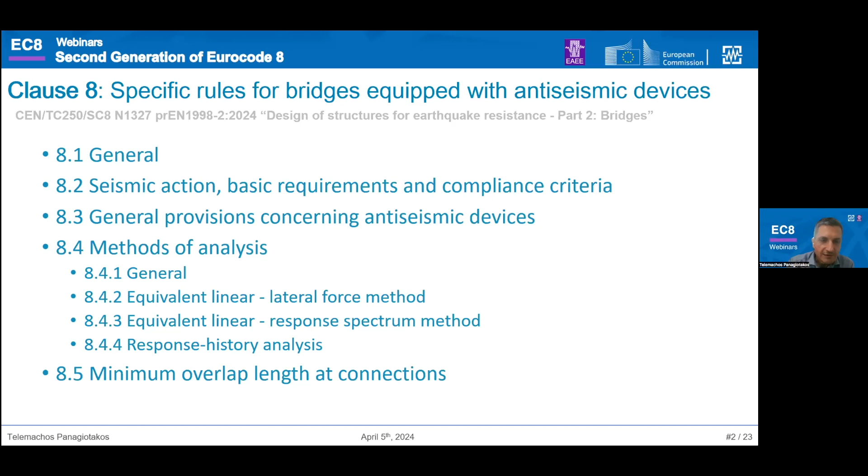Why do we have to redraft a clause that also appears in the existing Part 2 of Eurocode 8? Everything starts from the mandate, because the mandate clearly requires that the section for seismic isolation be updated given the most recent technologies in passive control, and improve the interface, and this is very important, between design standards such as the Eurocode and product standards such as EN 15129 for antiseismic devices, as well as the product standard for structural bearings, which is 1337.

So, based on the mandate, we have to redraft section 7, now section 8, of Part 2 of Eurocode 8 to move, omit, or redraft special provisions. Also, we have to cover fully isolated, and this is an innovation, also partially isolated bridges, which do not appear in the current standard. And we have, as required by the mandate, to improve the interface between the product standard and the Eurocode.

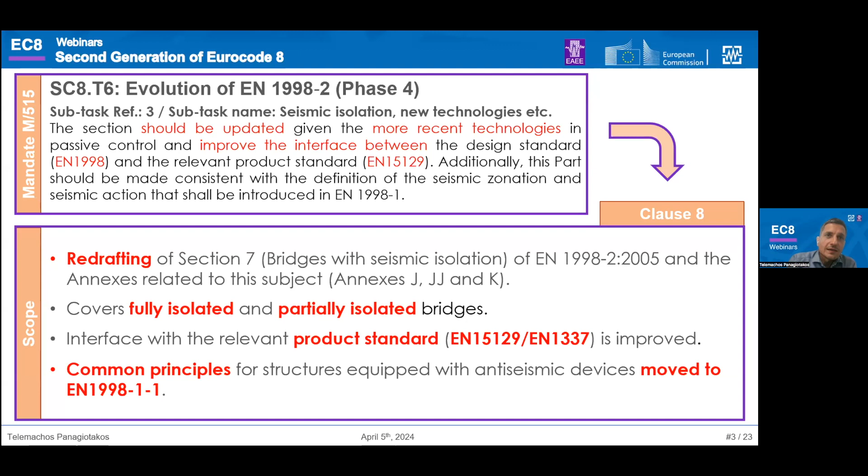Also, I have to mention this is the reason why this clause is very short. All the common principles required for the design of bridges with antiseismic devices have been moved to Part 1.1, which is the main part for the seismic design of structures in general.

So in this presentation, I try to divide it into 5 parts. The first covers what antiseismic devices are. And the remaining 4 parts cover specific provisions that we have in section 8 of the Eurocode. Let's start from the existing Part 2 of Eurocode 8.

In the existing Part 2 that we use today, we have the terms seismic isolators and seismic links. These are the only terms that describe seismic isolation as well as the seismic links that we use in current practice. Seismic isolation is defined as the provision of the bridge structure with special isolating devices for the purpose of reducing the seismic response of the bridge.

And the seismic links, respectively, are the restrainers through which part or all of the seismic action may be transmitted. Used in combination with bearings, they may be provided with appropriate slack so as to be activated only in the case when the design seismic displacement is exceeded. I also have to mention that in the current Part 2 we also have reference to bearings, and when we say bearings in the current Part 2, we are talking about fixed bearings, movable bearings, elastomeric bearings, seismic links, holding-down devices, and shock transmission units.

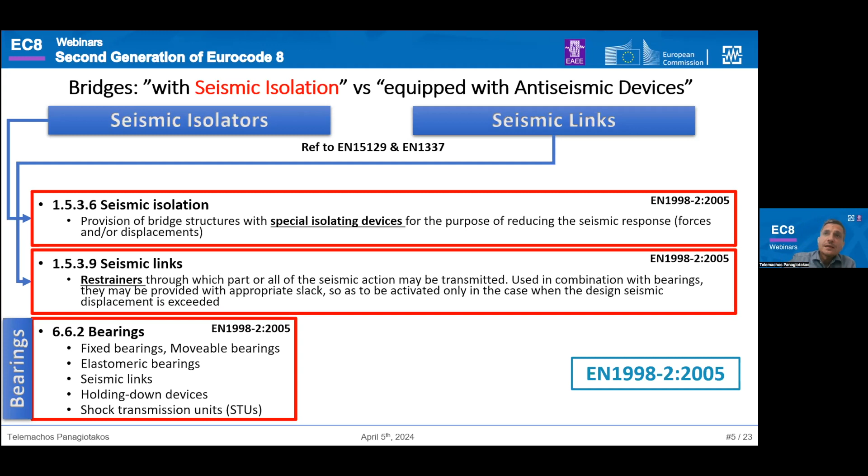This is the situation that appears in the current text. Now, in the second generation of Eurocode 8 Part 2, we substitute the term seismic isolators with a more general term, which is antiseismic devices. And antiseismic devices is not just a seismic isolator. Antiseismic devices covers essentially two kinds of devices: devices used as seismic isolators, but also devices used as energy dissipation devices, and also devices that provide both of these.

So we have in Part 1.1 the definition of what an energy dissipation device is. It's a disposable element of the energy dissipation system that dissipates energy caused by relative motion of each end of the device. It does not form part of the main structural system. So devices that provide energy dissipation. And the energy dissipation system is a collection of these devices.

On the other hand, we have the isolators. Devices possessing the characteristics needed for seismic isolation, namely the ability to support gravity loads from the superstructure, which is in many cases what is required, at least for seismic isolators in the non-seismic situation, and the ability to accommodate horizontal displacement. The isolation system is the collection of these devices.

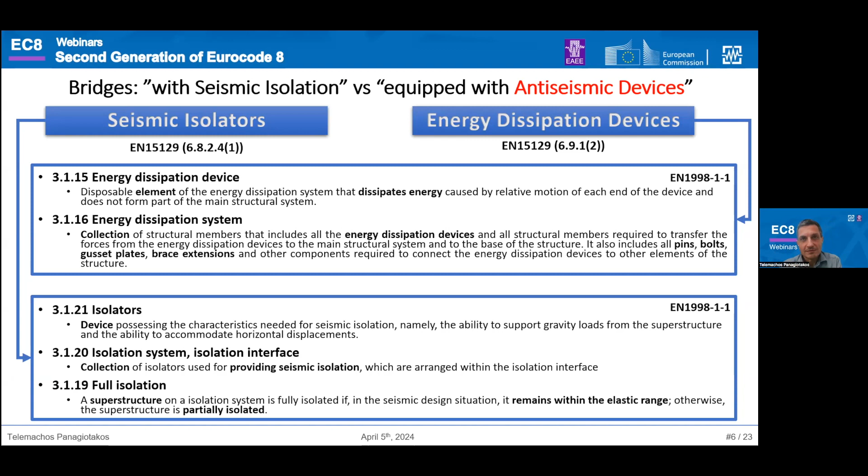And finally, it's important to note that we also have a definition for what we mean by the term full isolation. A superstructure on an isolation system is fully isolated, and I focus on this because it's very important in this part of the Eurocode, if in the seismic design situation it remains within the elastic range. Otherwise, the superstructure is partially isolated. So we have fully isolated bridges and partially isolated bridges. This is a definition that has to be clear in this part.

I remind you that the requirement from the mandate is to improve the connection with the product standards. And when we say the product standards for seismic isolation, we have to reference not only the antiseismic devices product standard, which is common sense, but also the typical structural bearings, which are covered by the product standard EN 1337.

I remind you that the structural bearings standard EN 1337 is applicable to structural bearings used on bridges or other structures. The European standard does not cover bearings that transmit moment as a primary function, bearings that resist uplift, bearings for moving bridges, concrete hinges, and seismic devices. I ask you to be very careful that this European standard does not cover this situation. So EN 1337 does not cover, in general, seismic devices.

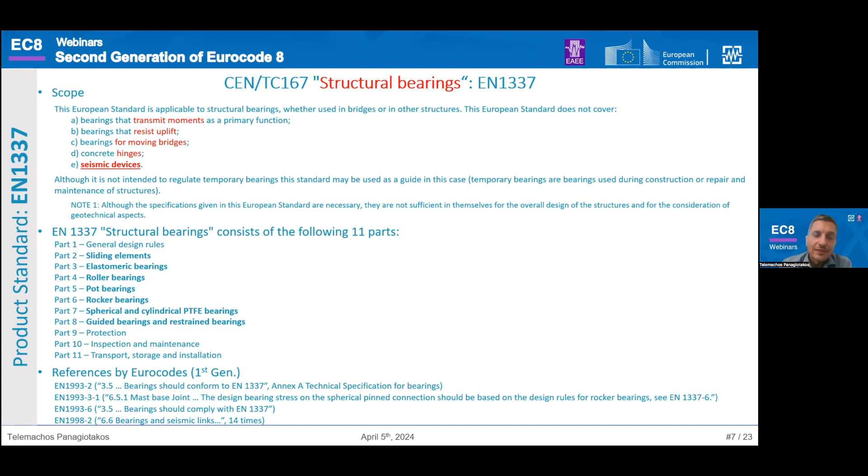Why? Because we have another product standard, EN 15129, whose scope is to cover the design of devices that are provided in structures with the aim of modifying their response to the seismic action. It specifies functional requirements and general design rules for the seismic situation, material characteristics, manufacturing, testing requirements, as well as evaluation of conformity, installation, and maintenance requirements. All these tasks are covered by the product standard, not by the design standards. So testing requirements, evaluation of conformity, manufacturing, installation, maintenance, etc., should refer to the product standard.

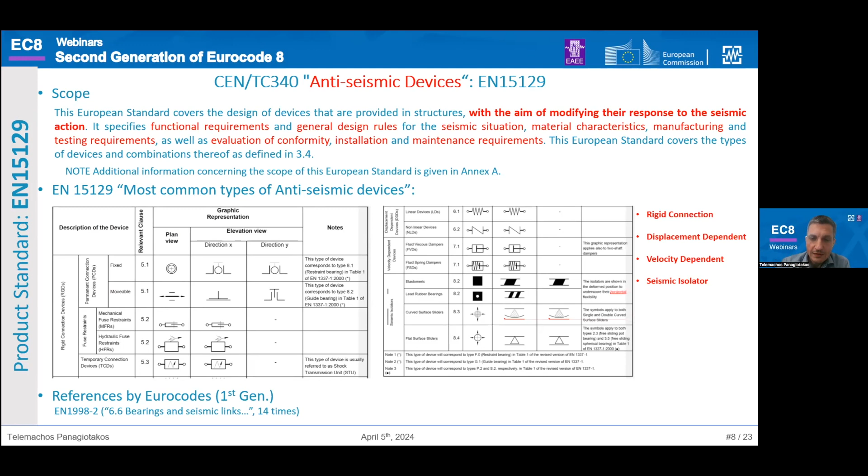The most common devices covered by this standard are rigid connections, displacement-dependent devices, velocity-dependent devices, and typical seismic isolators. We also have, in the current version of Eurocode 8 Part 2, reference to this standard, but it's very limited. Why? Because when the code was written in 2003, 2004, this product standard did not appear as a standard. It was a kind of pre-standard, so we had a prEN 15129. Now we have it as a standard, so we can fully follow this product standard.

Just to give you an idea what is covered by this product standard for antiseismic devices, we can have sliders, which can express linear response. If guided, they can be linked; otherwise, they are freely displaced. We have elastomeric bearings with low damping or high damping, so we can have a linear or non-linear response. We can have lead rubber bearings, where again we have a non-linear response.

We have the friction pendulum system, which depends on friction, so it is sensitive to vertical load. This is why Professor Franchin also mentioned in his presentation why the vertical action is critical. For devices like this, the vertical action is very critical. We also have viscous dampers. These are velocity-dependent devices, and of course with non-linear response. We also have spring viscous dampers, again with a non-linear response.

But what is more important in showing all these devices is that many devices finally provide a combination of isolation on one hand, lengthening the period, which is the aim of isolation, and energy dissipation, so increasing damping, on the other hand.

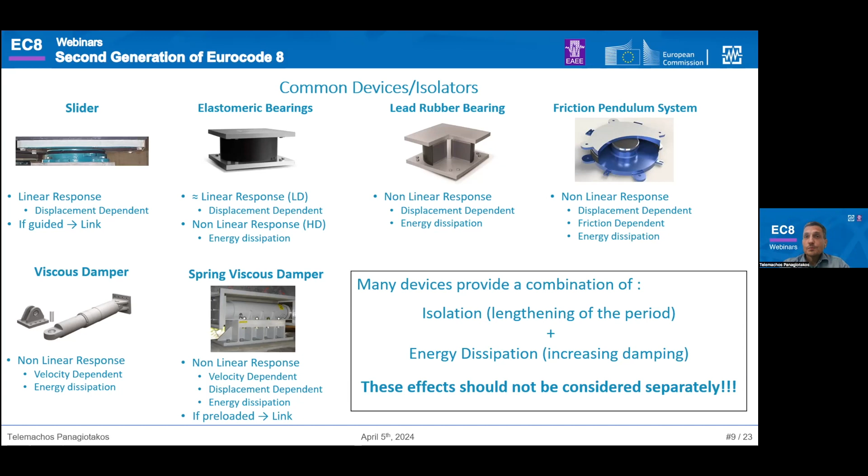So we have a combination of this, and we cannot, of course, in any case, consider these two effects separately, because already it's combined. Now, why I mentioned two product standards instead of one? Because,

well, we all know very well that the antiseismic devices are covered by EN 15129. But also in Eurocode 8 Part 1-1, it is strictly mentioned that in low seismic action class, rigid connection devices and structural bearings should conform not to antiseismic devices, but to structural bearing devices, to EN 1337. Or if not covered by the standard, you can cover it by European technical approval, but this has to do with the conformity process to a standard or to a European technical approval. This is the reason that in this presentation I have also mentioned this product standard.

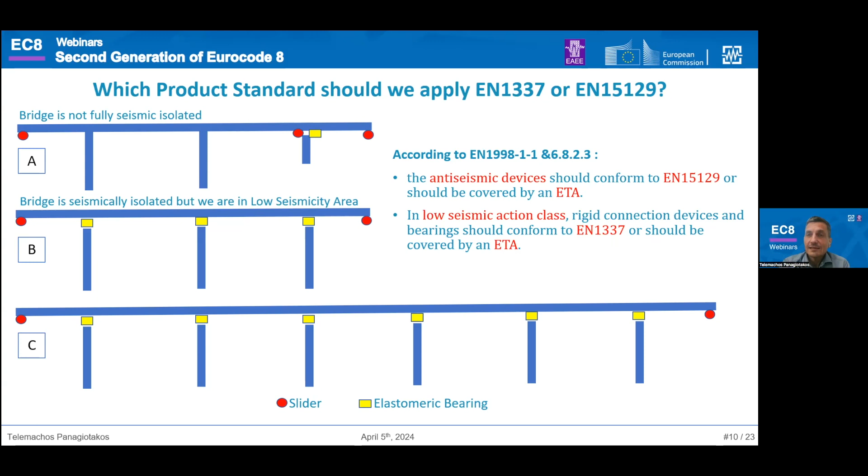In the majority of cases where we have moderate or high seismicity, the product standard that we follow is the antiseismic devices standard, EN 15129. Now, going to the main part of Eurocode 8 Part 2 regarding the design of bridges equipped with antiseismic devices, I try to point out the additional requirements to EN 1998-1-1 regarding the design of the structure.

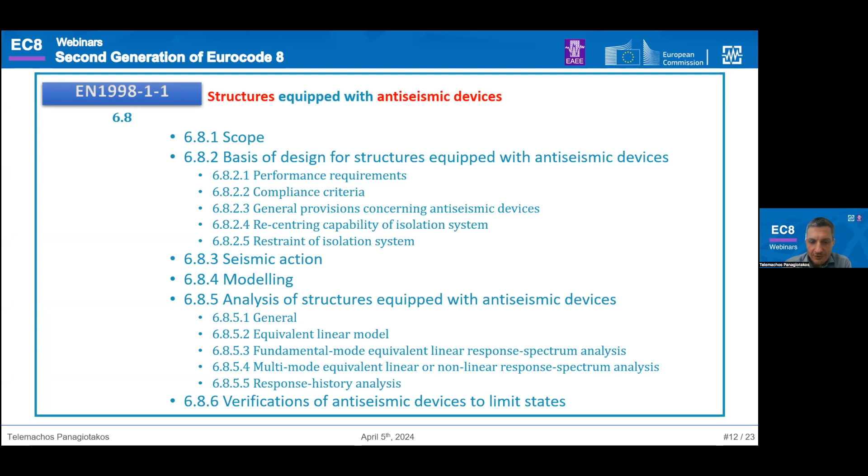And starting from what is provided now as a requirement in Part 1-1 of Eurocode 8, you can see that section 6.8 covers the design of structures, not bridges, because this is a general part, of structures equipped with antiseismic devices. Therefore, if someone has to design a bridge with an antiseismic device, it should conform to all the requirements provided in this section. The only additional requirements you'll find in Part 2. And I note this because it's very important: the majority of the requirements for antiseismic devices are covered in Part 1 and not in Part 2, because they're common for all structures equipped with antiseismic devices.

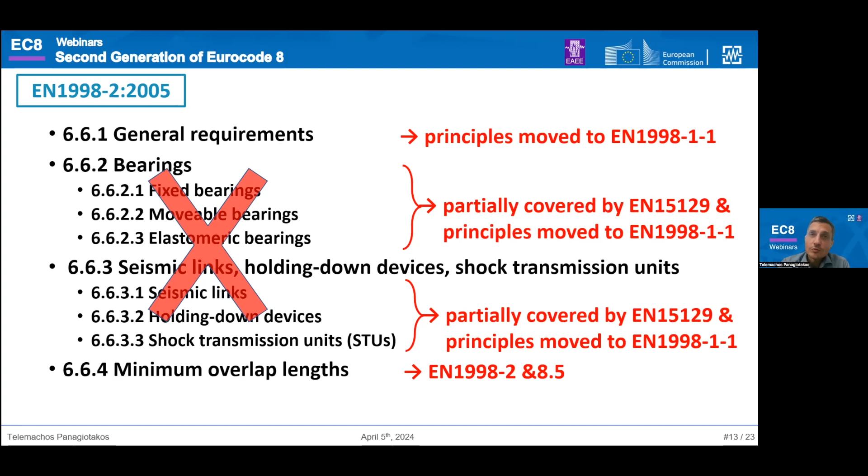Regarding now Part 2, if you follow the text of the second generation, you can see that we have reduced the number of pages, as I said at the beginning of this presentation, to no more than 4. Why? Because the majority of the provisions that exist in the current Part 2 related to the product standard, so we have to remove them, because the requirements for the product are not covered by a design standard but by the product standard itself. And this is the reason that, as you can see in this slide, the majority of the text has moved, because it's covered by a product standard. It's not the correct position here. And also, the common principles for antiseismic devices moved to Part 1.

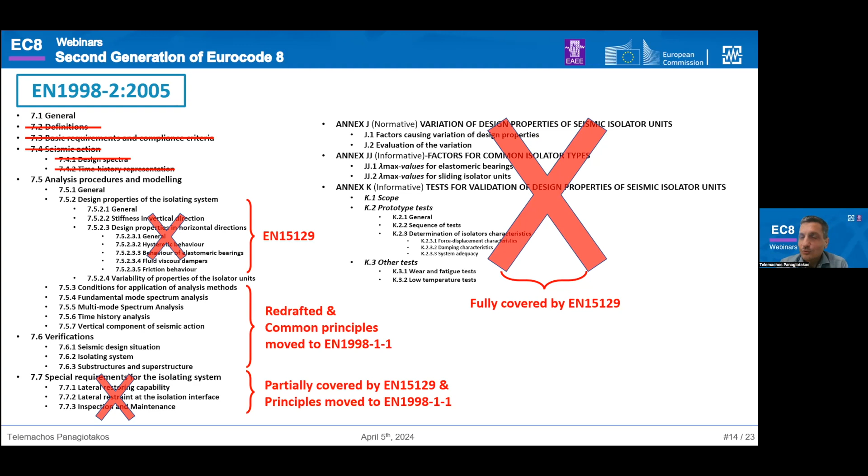And so, we have eliminated more than 30 pages, I think, that exist in the current Part 2, to 4 pages now in Part 2 for the design of bridges equipped with antiseismic devices. You can see, for instance, all the annexes related to the variation of the design properties, the lambda factors for the common isolator types, the tests for the validation of the device properties. All these tasks are covered by the product standard. And this is why we don't have them now in the Eurocode. You cannot find them in any part of the Eurocode. You can find them in the product standard.

Now, regarding the seismic action, the basic requirements and the compliance criteria, I have to mention that in fully isolated bridges, the superstructure should remain in the elastic range under the capacity design effects. This is a basic requirement, but note that it affects fully isolated bridges, and this is important. It's not a requirement for partially isolated bridges. The substructure of fully isolated bridges, and the secondary structural members, the isolated supports, for instance, of partially isolated bridges, should again be designed in the non-dissipative range, and the verification for these members should be according to the requirements for ductility class 1. The exception is for tall heavy piers or pylons, a very specific situation where we ask for design according to ductility class 2 and not ductility class 1. So we ask for additional energy dissipation in these members, but this is a very specific case.

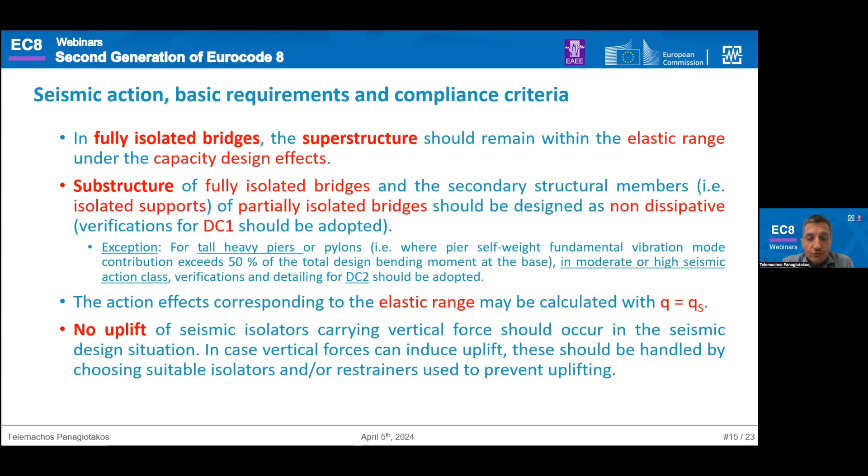The action effects in the elastic range, which is the requirement for the deck, can be calculated using the q factor method, where q is equal to qS. Another requirement for bridges equipped with antiseismic devices is that uplift of the seismic isolators is not permitted, and in case we have uplift, it should be handled by choosing suitable isolators or restraints to prevent uplift.

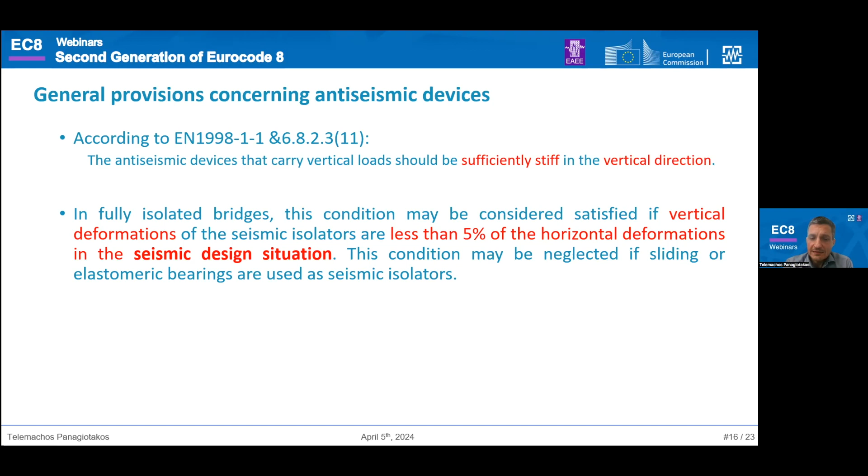Regarding the vertical stiffness of the isolators, a special provision is required according to Part 1-1. We also have for fully isolated bridges a special provision where this condition may be considered to be satisfied if vertical deformations of the seismic isolators are less than 5% of the horizontal deformation in the seismic design situation. This condition may be neglected, of course, if sliding or elastomeric bearings are used as seismic isolators.

And another requirement that appears in Part 1-1, but it's very critical and related to the antiseismic devices, is the re-centring capability required of the isolator and the isolation system. According to Part 1-1, the reversible stored energy, which is the sum of elastic strain energy and potential energy, should be greater than 1/4 of the energy dissipated by the devices. If we satisfy this principle, we have satisfied the re-centring capability requirement.

But it is recognized that in practice this is not very trivial to calculate. Therefore, and this is something that appears in the second generation of the Eurocode, we provide an alternative requirement for a system with a bilinear behavior, where we ask to satisfy a specific relation regarding the displacement. And even if you cannot satisfy this equation, which I don't want to go into in detail, you also have the ability to cover the requirement by increasing the design displacement for the isolator by a factor of rho d, which is also provided by the code.

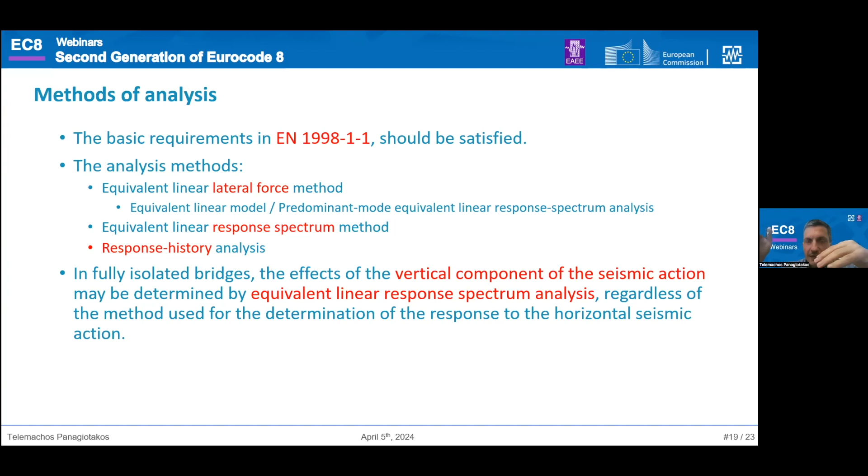Regarding the method of analysis, I don't want to go into more detail. We have all the methods that appear in the general part and also in the part for bridges. The lateral force method can be applied, the equivalent linear response spectrum and response history. What is important is that in fully isolated bridges, the effect of the vertical component of the seismic action may be determined by equivalent linear response spectrum analysis, regardless of the method used for the response in the horizontal direction. So for the vertical we can have a response spectrum analysis, and for horizontal we can have other methods of analysis.

Typical methods for the analysis of bridges equipped with antiseismic devices are the equivalent lateral force method, a single degree of freedom system method where the whole bridge is modeled as a single degree of freedom system. The code provides the properties of this system, and with an iterative method you can end up with the requirement for the design displacement of the isolators.

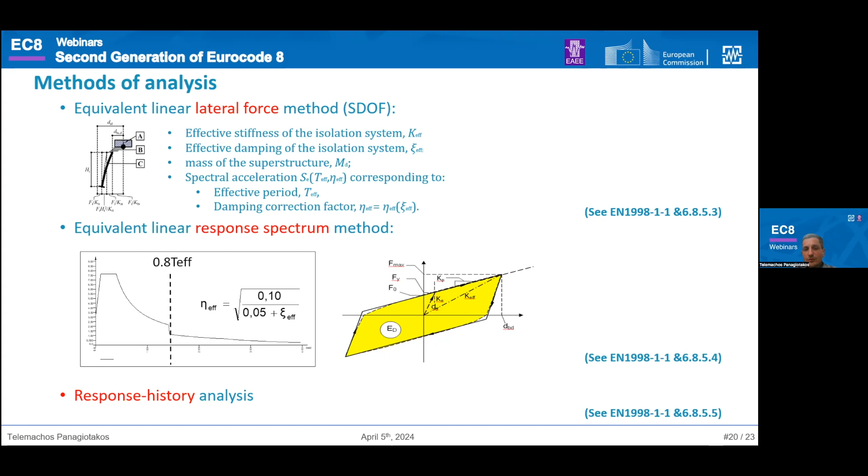The second method is based on a linear response spectrum method, where essentially we modify the design spectrum by the introduction of a damping modification in a special range of the spectrum. And of course, as in any case, we have the ability to perform a response history analysis to take into consideration the full response of the antiseismic devices.

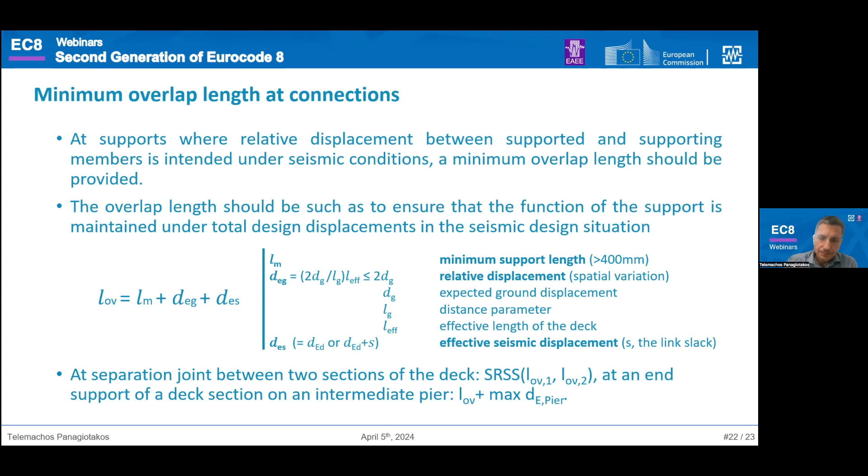I want to say that the design of bridges with antiseismic devices is not only for the design of new bridges, but it's also a method you can use for the intervention of upgrading existing bridges. So we have a method that is provided for new structures, but this method, this principle and all the requirements also apply to existing structures. This is covered by Part 3 of Eurocode 8 as a method of intervention.